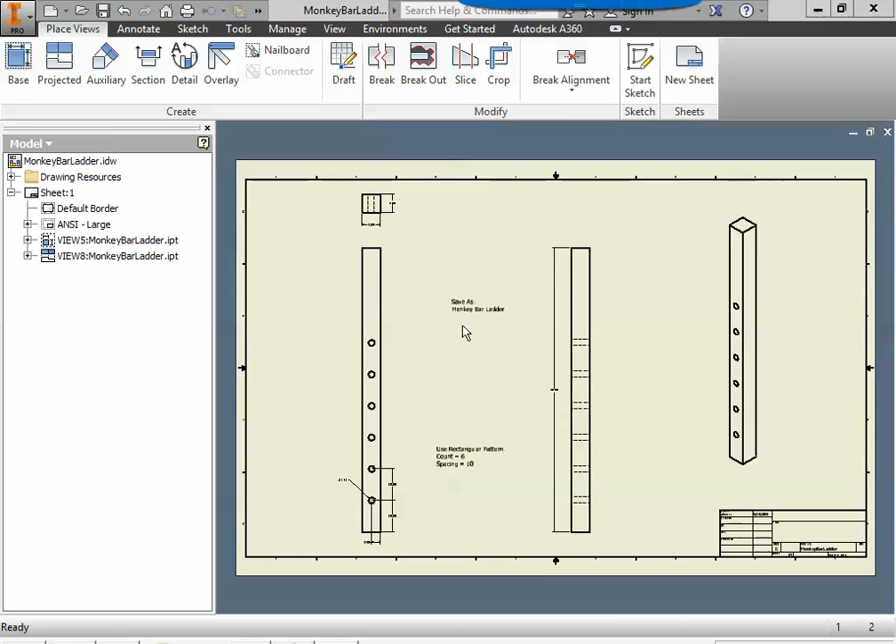In this episode, we're going to be looking at how to create the monkey bar ladder. Our monkey bar ladder is going to be 90 inches long, or 90 inches high, we'll say, 6 inches wide, and 6 inches deep.

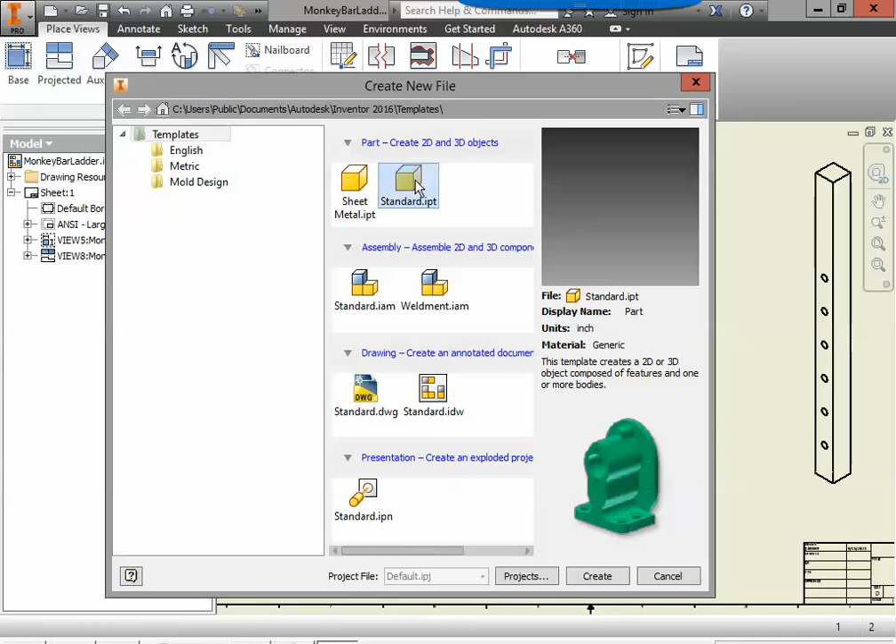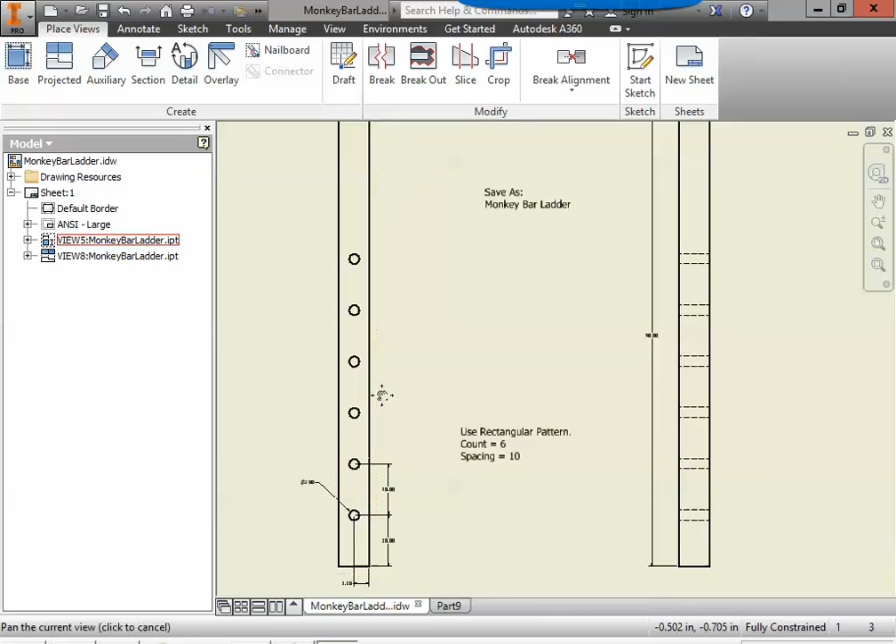So the first step is go to the Inventor I and create a new standard IPT. We're going to start a 2D sketch on the XY plane, and now we're going to draw a rectangle. The rectangle we're going to draw is this one right here on the front. So we're going to draw a rectangle that is going to be 6 inches wide and 90 inches tall.

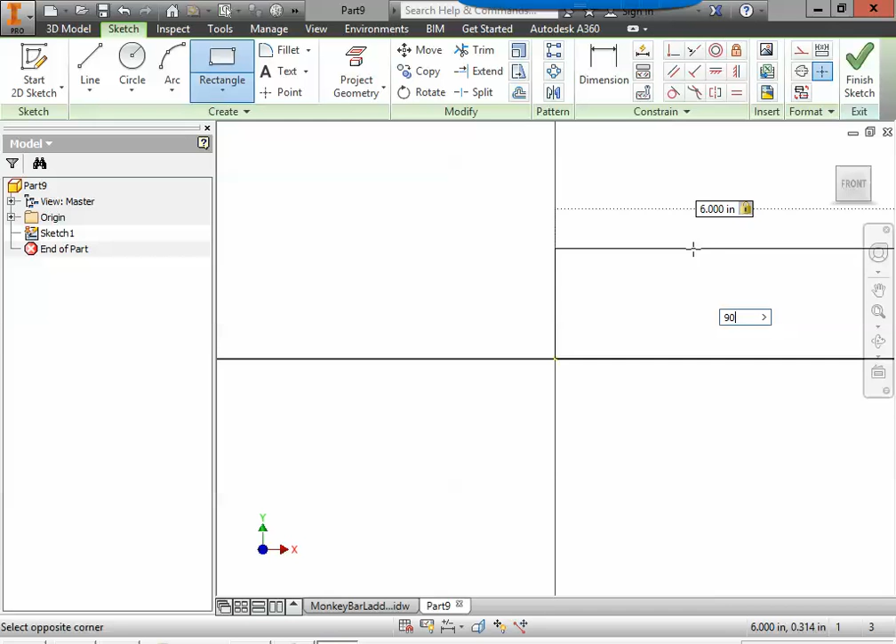So let's grab the 2-point rectangle, start at the center, the origin. We're going to tell it the width should be 6 inches. We'll hit the tab key. The height should be 90 inches. And I'll zoom all. Looks good. Let's finish our sketch.

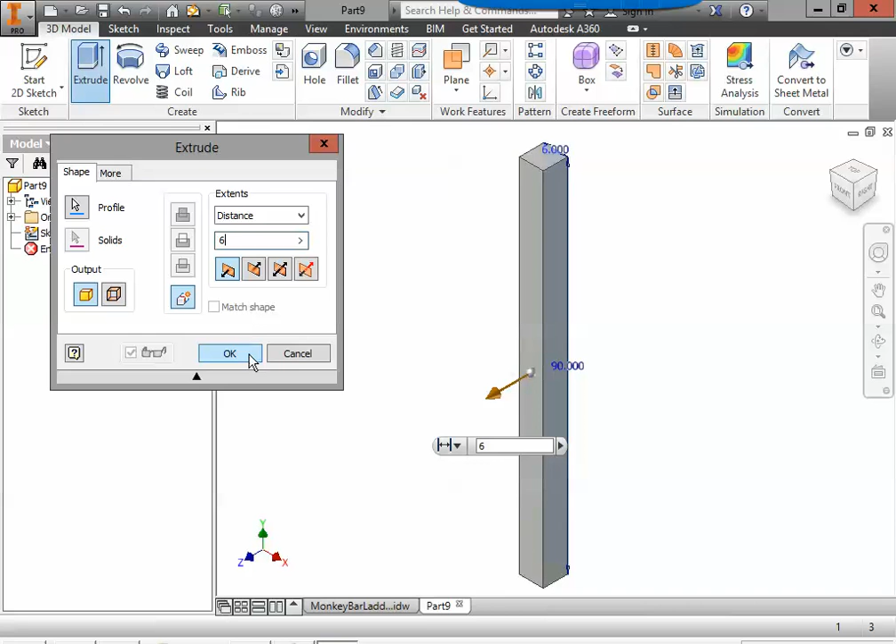Let's extrude. Why don't I back out, make it a little easier to see. Let's extrude that rectangle 6 inches. I'm getting that right off of here, so it's 6 inches wide and 6 inches deep. Looks good so far. Next up, we need to add the holes on there.

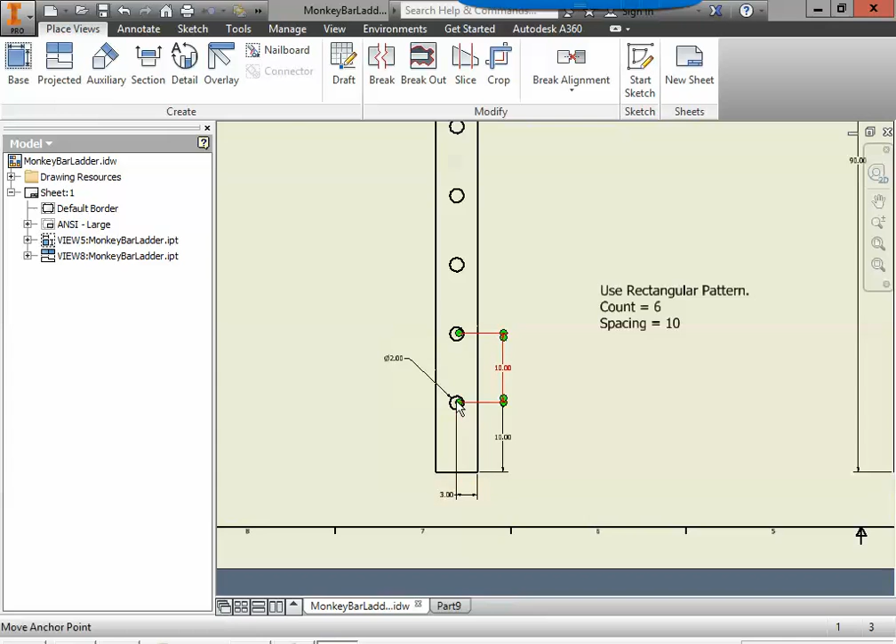The holes can be done a number of different ways. We're actually going to be putting a single point on there, and then we're going to rectangular pattern that point. After we do that, we're going to be using the hole tool to cut out these holes. So the point that we need is going to be placed right at the center of this hole, and it's going to be 3 inches from the side and 10 inches from the end.

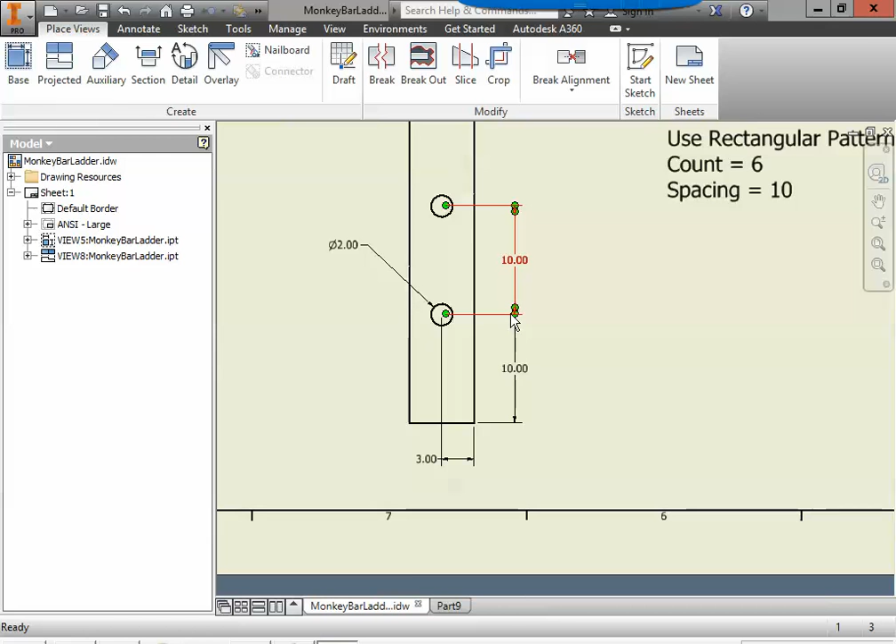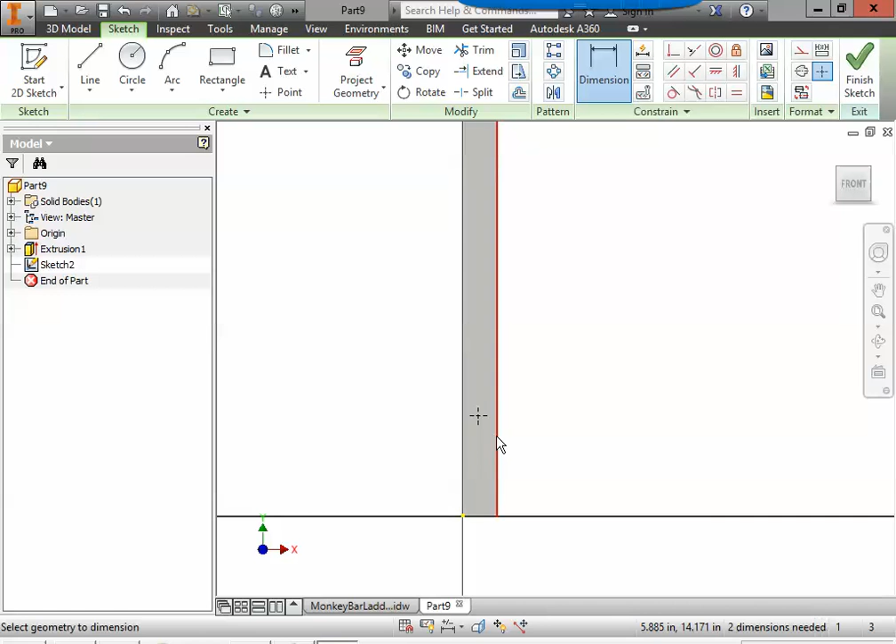Okay, let's go back to our part. We're going to create a 2D sketch on the front, so I'm going to select the front right here. We're going to place a point somewhere on our part, and then we're going to put some dimensions on there. So the first dimension is from the side of our piece to the center of that dot. We'll place the dimension and tell it to be 3, enter.

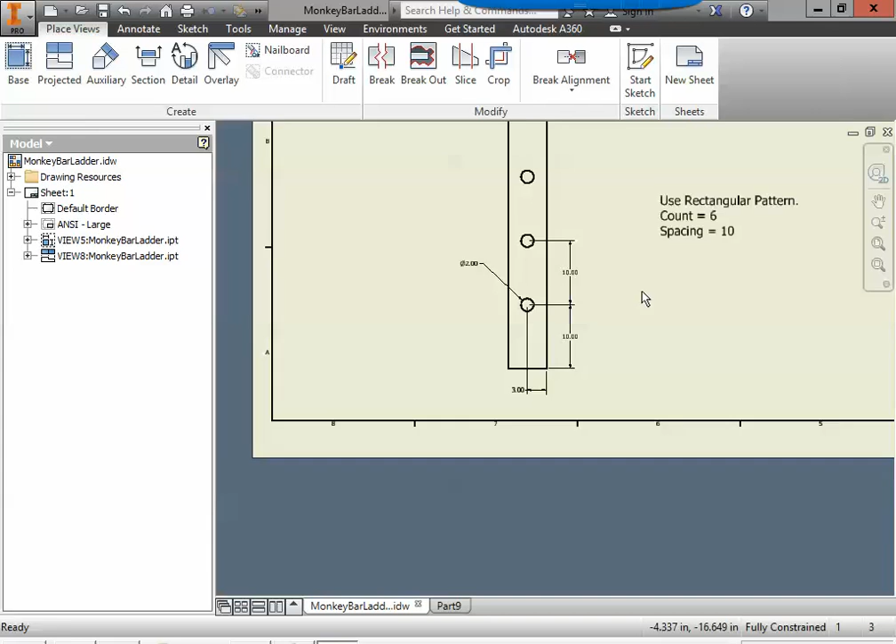The next dimension is going to be from the bottom of our part to that center point, and that needs to be 10 inches. Now we're going to use a rectangular pattern. If we look on here, there are 1, 2, 3, 4, 5, 6 holes. So our rectangular pattern is going to have a count of 6. And they are equally spaced 10 inches apart. So our spacing is going to be 10.

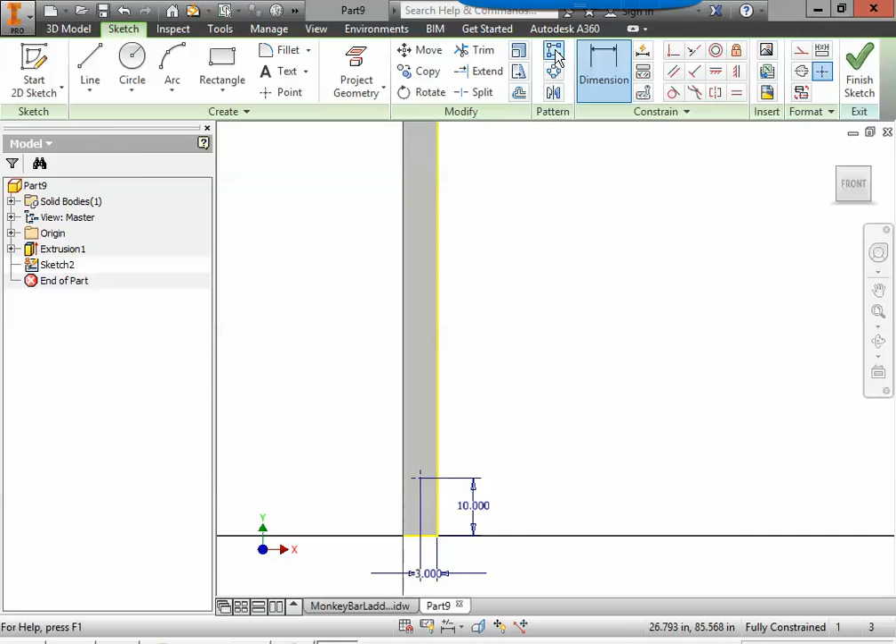So when we come back here, we're going to come to the pattern area. There's rectangular pattern, circular pattern, and mirror. We're going to use the rectangular pattern. Step 1 is to tell it what geometry would you like to pattern. And in this case, it's a dot, or that point. So we'll click on that once it's red.

The second step, it needs to know which way you'd like to pattern. Do you want to pattern left to right or up and down? We want to go up and down, so we're going to select the direction arrow and select an up and down line. Lucky for us, it's already patterning up. If it was going down, we could grab the flip tool and flip it down, up, down, up. So let's leave it pointing up.

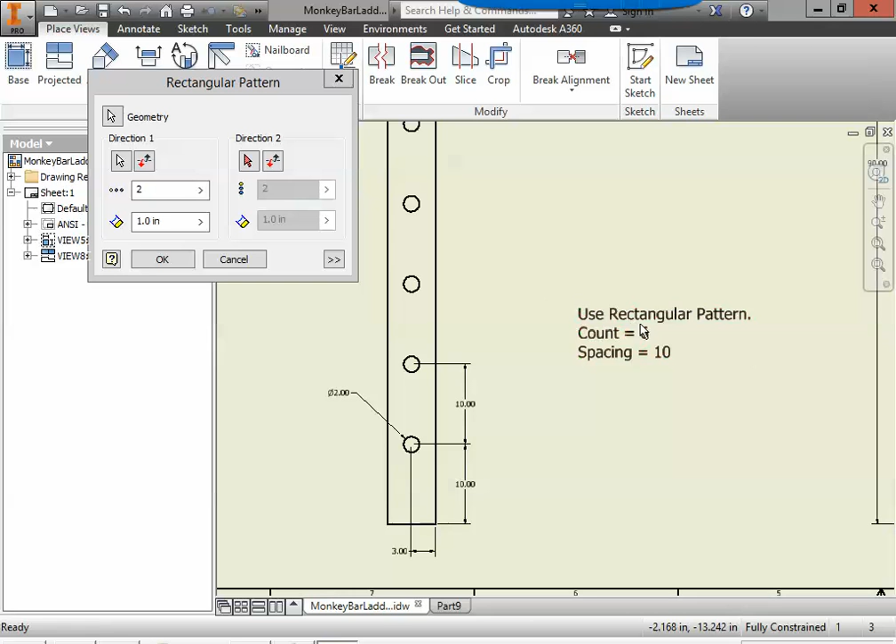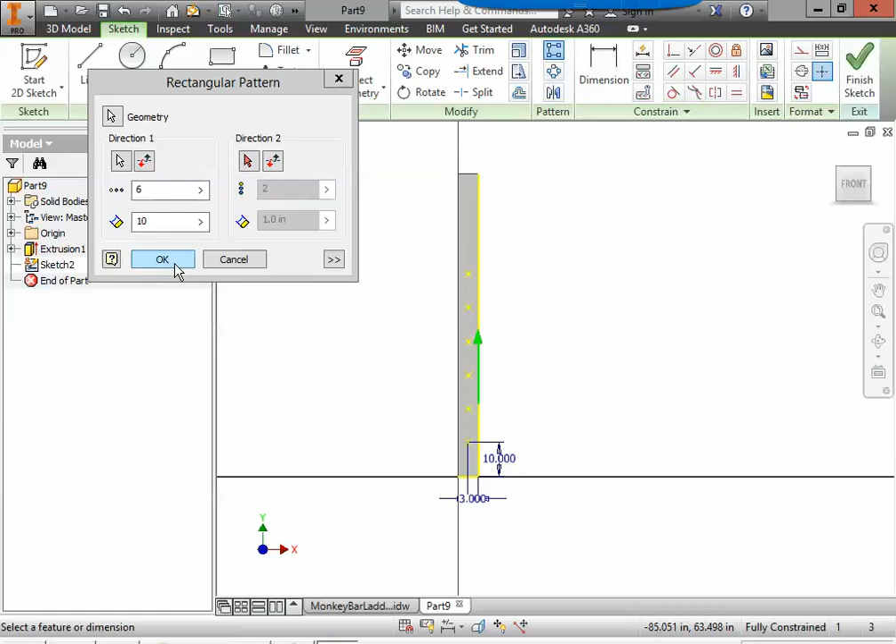Then what did we say our count and spacing were going to be? 6 for a count, 10 for a spacing. So let's put in 6 for our count and 10 for our spacing. And that looks good because the monkey bar ladder doesn't have holes going all the way to the end. So once we have that, we can click OK and finish our sketch.

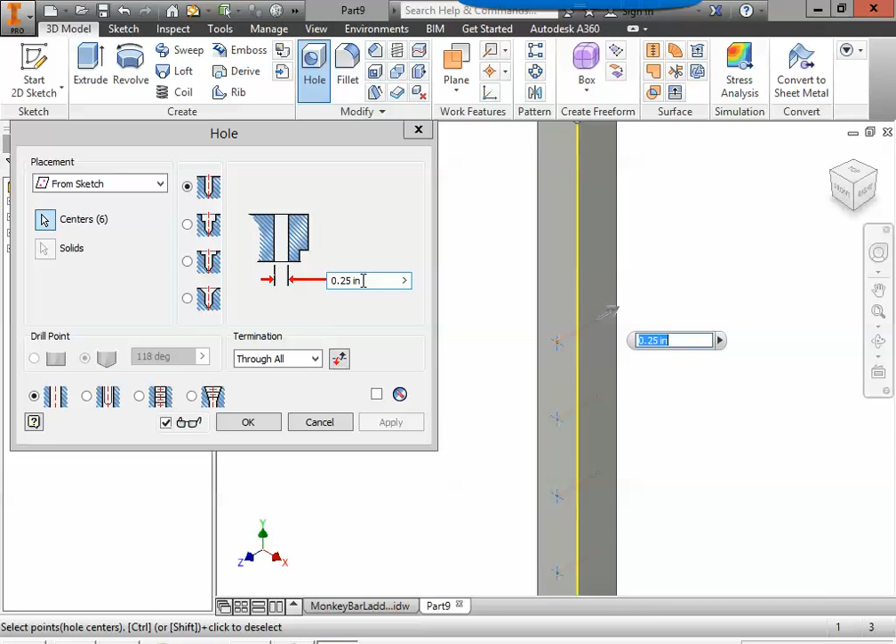And now we can use a very helpful tool called the hole tool. Thankfully, the hole tool will grab all of those points for us. Right now it is set with a diameter of 0.25 inches and it's set to cut through all. Well, we do want it to cut through all, so we'll leave that. But over here, we notice that the diameter of these circles are going to be 2 inches. So we're actually going to have to change the diameter from 0.25 to 2.

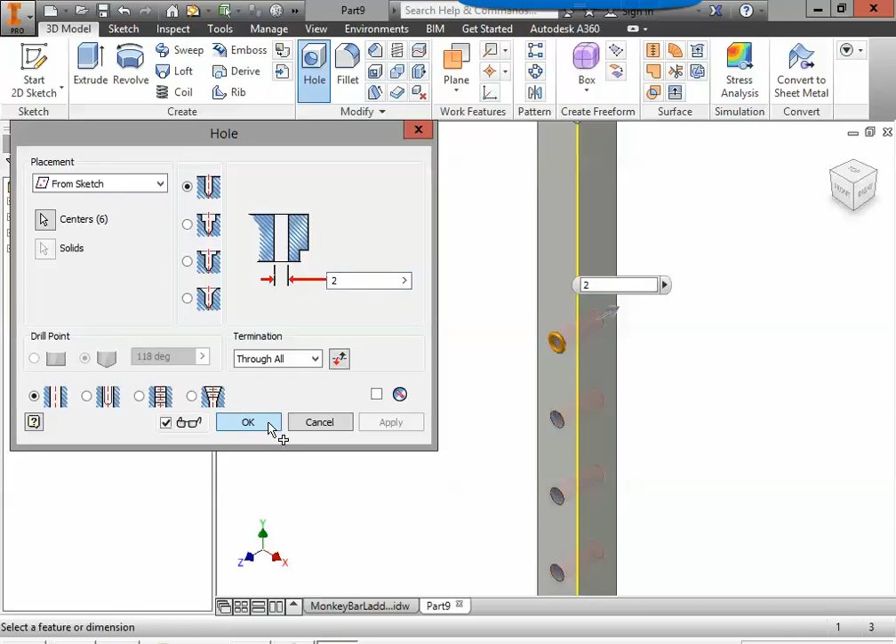So we've got the right diameter, we have it cutting through all of the part. We can hit OK. And there you go. We have the monkey bar ladder with our 6 holes 10 inches apart, cut through all.

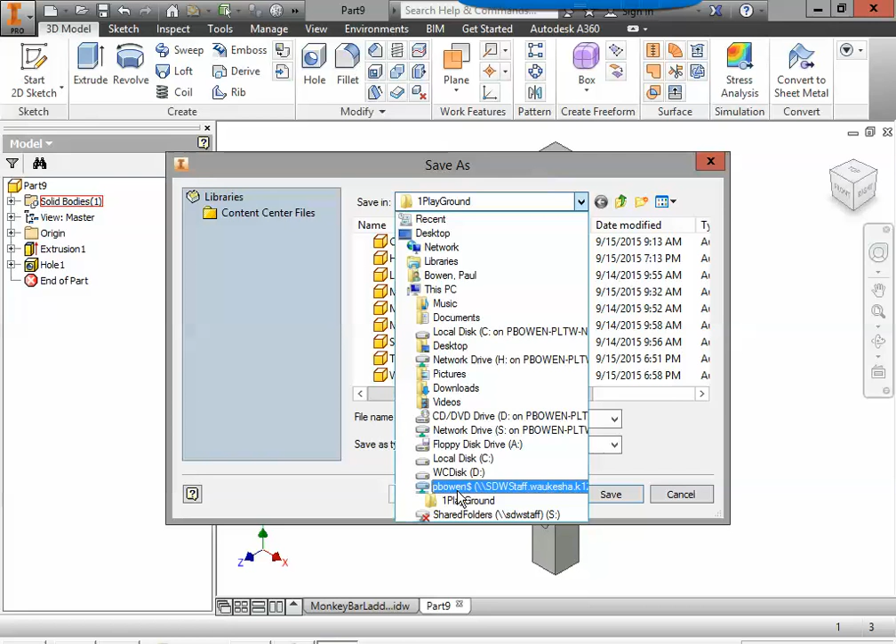Lastly, we're going to have to save this. So let's go to the Inventor I, select Save As. You're going to want to select your H drive. I have a folder that I'm going to put it in. And we have to give it a good name. So let's call this Monkey Bar Ladder.